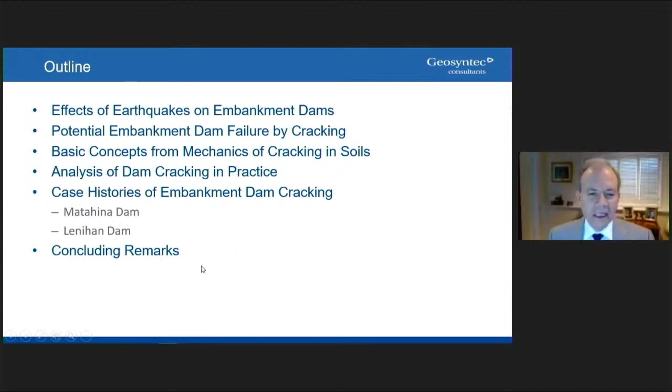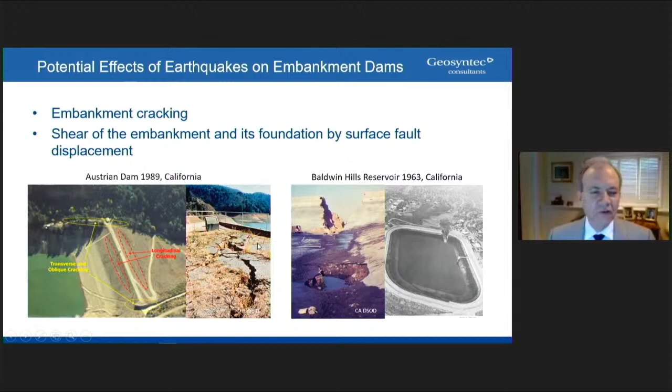Past experience has shown that earthquakes can affect embankment dams in multiple ways. The potential effects of earthquakes on those dams include slope failure of the embankment, sliding of the embankment through the foundation, embankment deformation and settlement, embankment cracking, shear of the embankment and its foundation by surface fault rupture, differential tectonic displacement of the reservoir and of the dam foundation, reservoir rim landslides, which could lead to overtopping of the dam, and failure of the spillway or outlet works.

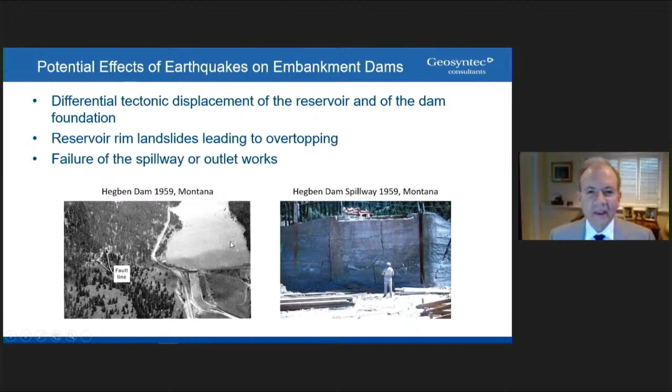Previous observations have shown that embankment dam cracking is one of the most common and hazardous effects of earthquakes on embankment dams. Cracking is usually observed at the crest of dams and along the upstream and downstream slopes, and can take various orientations and shapes.

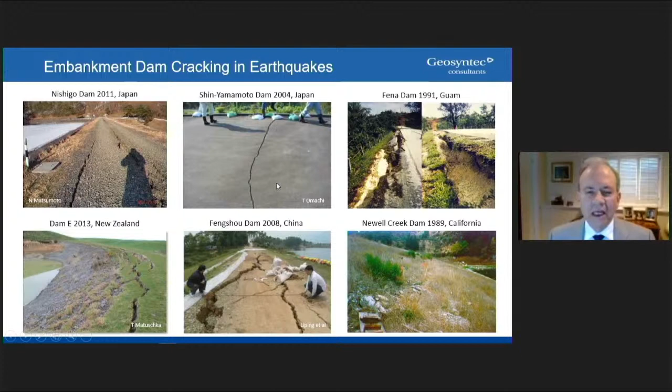However, past observations have also shown us that earthquake-induced cracks are commonly oriented in longitudinal and transverse directions relative to the dam axis. As pointed out by Sherard in 1973, earthquake-induced cracks are frequently similar in pattern to cracks due to static loading.

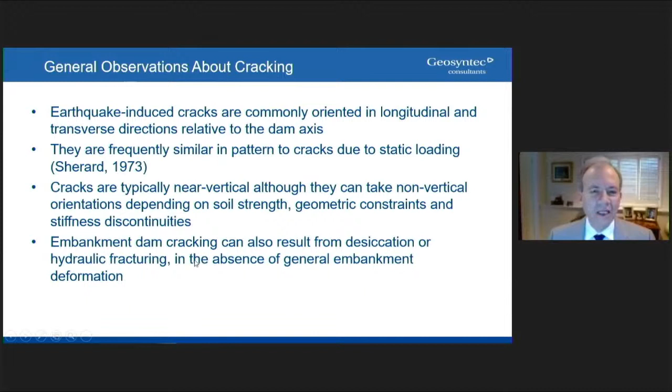Cracks are typically near vertical because of the sustained stress field imposed by gravity. However, they can also take non-vertical orientations due to arching, depending on soil strength, geometric constraints, and stiffness discontinuities. It is also important to note that embankment dam cracking can also result from desiccation or hydraulic fracturing in the absence of general embankment deformation.

The mechanisms of dam deformation and cracking induced by earthquakes are generally associated with transverse spreading of the embankment and settlement of the shells, which lead to tensile strains normal to the dam axis, resulting in longitudinal cracking. Strong earthquake shaking and dam deformations along the longitudinal axis of the dam, as well as settlement, can lead to transverse cracks, particularly near steep abutments or above irregularities in the foundation profile of the dam.

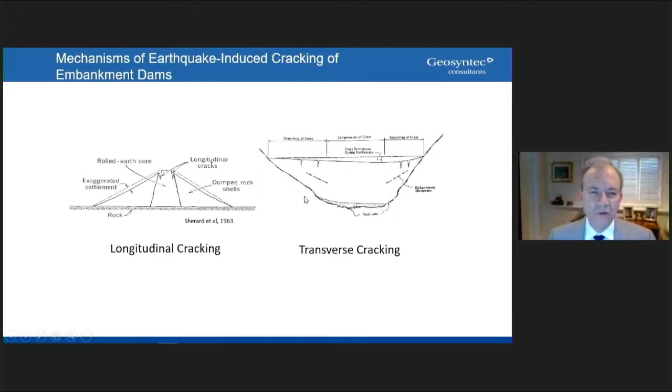Our experience tells us that earthquake cracking can lead to dam failure and breaching in multiple ways. Earthquake-induced cracking is an early step in various potential failure modes in embankment dams. For example, cracking can lead to increased seepage and leakage, which in turn can lead to internal soil erosion and piping failure of the dam. Or it can lead to embankment saturation and instability, or both. Cracks oriented transverse to the dam axis, which allow concentrated flows through the embankment, are particularly dangerous.

The mode of failure of embankment dams by cracking and piping can be visualized by considering a zoned embankment dam with pervious shells, a clay core, and a chimney filter and drainage blanket. Let's assume that an earthquake occurs and cracks the core crosswise below the reservoir level. The crack provides a conduit for concentrated leakage across the core.

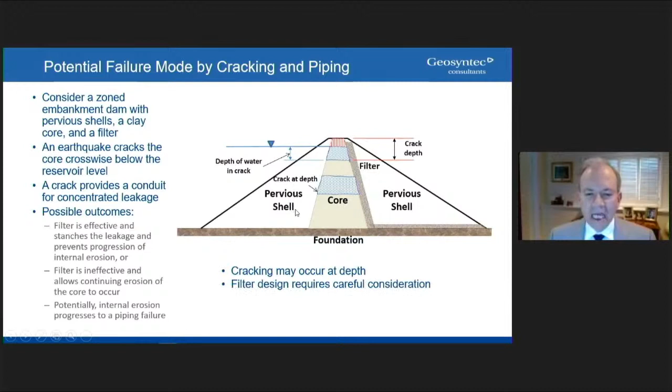It is important to remember that cracking can occur at depth, in fact at significant depths, as I will show later. It is also quite clear that filters and drains are critical elements to the safety of embankment dams, and that filter design requires careful consideration. Evaluation of this type of PFM, potential failure mode, requires reliable assessment of the potential for, the location, and the extent of cracking.

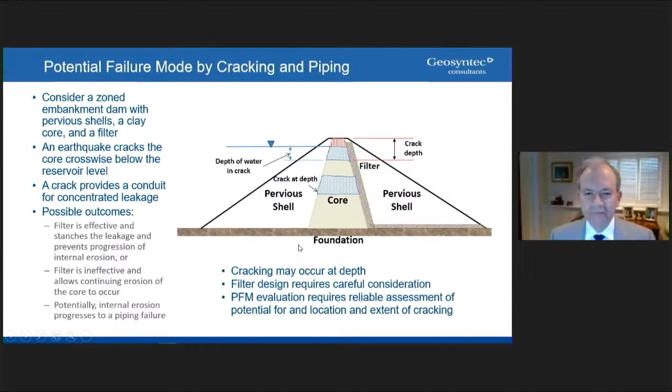To better understand the potential for cracking in embankment dams, it is useful to review some of the basic concepts about the mechanics of cracking in soils.

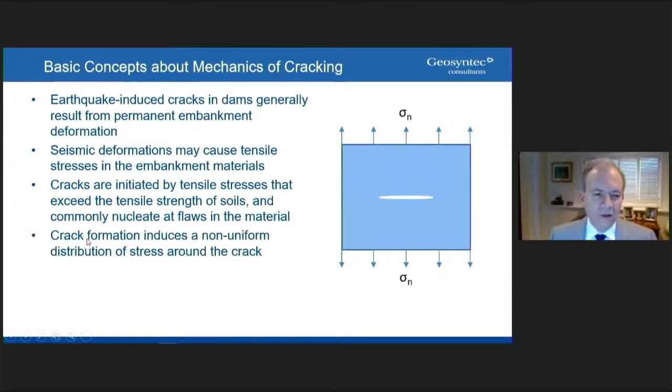Firstly, earthquake-induced cracks in dams generally result from permanent embankment deformation. This is because seismic deformations may cause tensile stresses in the embankment materials. Cracks are initiated when those tensile stresses exceed the tensile strength of soils and commonly nucleate or originate at flaws in the material. Once a crack is formed, it induces a non-uniform distribution of stress around the crack, such that the cracking in soils continues to propagate until the driving stress conditions change or the capacity of the soil to support an open crack is exceeded.

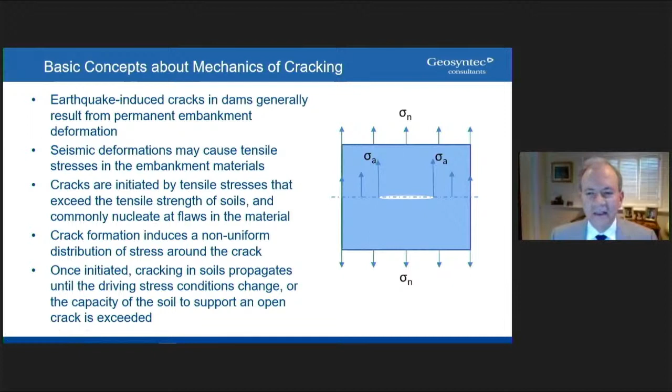Tensile failure of soils is typically quite brittle, and this is because cracks propagate by fracturing as opposed to yielding of the soil. Cracking can be expected to occur when and where the tensile stress exceeds the tensile strength of the soil. When the tensile stress reaches the tensile strength, the material completely loses its ability to carry tensile stress.

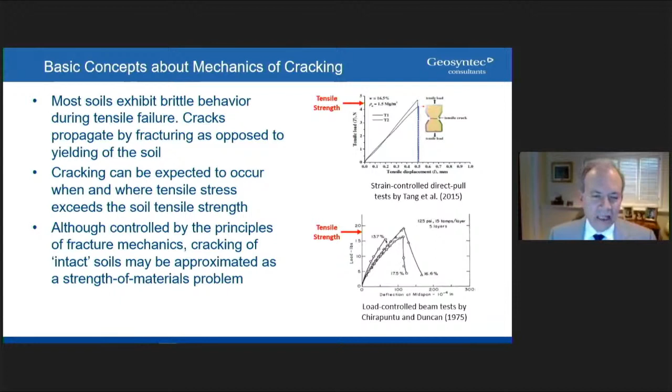Although the process of cracking is very complex and is controlled by the principles of fracture mechanics, cracking of intact soils may be approximated as a strength of materials problem. These concepts provide a basis for the analysis of cracking in practice. That analysis generally consists of identifying zones of extension where tensile stress exceeds the tensile strength of the soils.

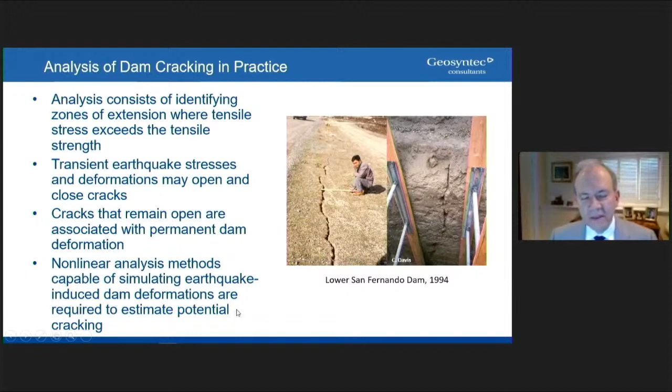It is important to note that transient earthquake stresses and deformations may open and close cracks temporarily. However, cracks that remain open after the earthquake are associated with permanent dam deformation. Therefore, analysis methods for continuous media are generally satisfactory in practice, provided they can simulate permanent dam deformation. This means that nonlinear analysis methods capable of simulating earthquake-induced permanent dam deformations are required to estimate potential cracking.

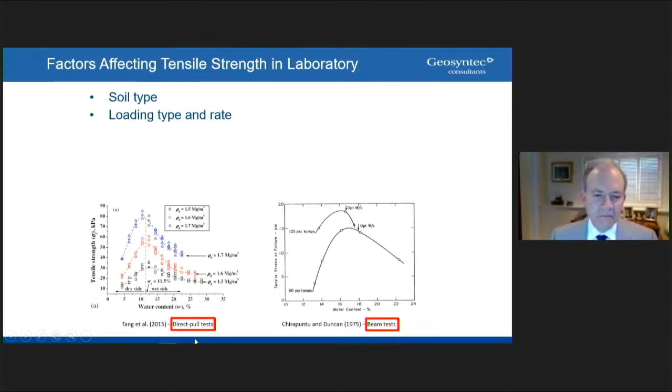Because the tensile strength of soils in the laboratory and in the field plays an important role in cracking, it is useful to understand the factors that affect such strength. These include soil type, the loading type and loading rate, which basically is dependent on the type of test or condition in the field, the water content at the time of loading, and the placement conditions of the soil, including its density and water content.

In these tests, for example, you can see that the tensile strength of soils varies from relatively low values of about 15 kPa to moderate strength values of maybe 75 kPa, and peaks at a water content near just dry of the optimum water content.

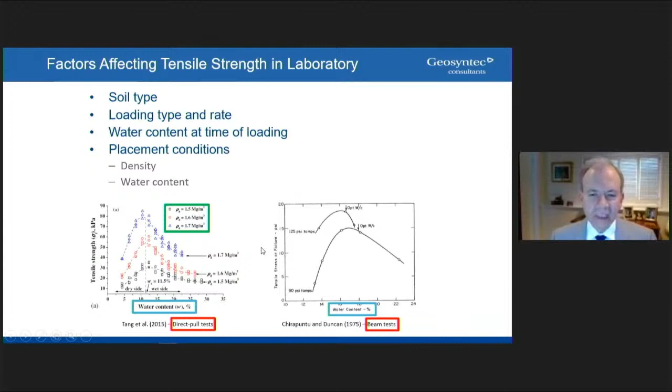The strength that matters for analysis is the field strength. It's important to keep in mind that because cracks nucleate at flaws in the material, the tensile strength of soils depends on specimen size.

Laboratory testing has shown that the tensile strength of soils decreases inversely proportionally to the volume of the stressed soil. This is expressed by an equation where the tensile strength is basically an inverse function of the volume of a specimen subjected to at least 95% of the maximum tensile stress. Because the volumes involved in the field are very large, the field tensile strength of embankment dam materials is generally 1/10 to 1/30 of the strength in the laboratory and is typically very low.

Therefore, for dams, it is quite common to assume a zero tension cutoff in the analysis. This is important because overestimating the tensile strength of soils leads to underestimating the potential and extent of cracking in the field.

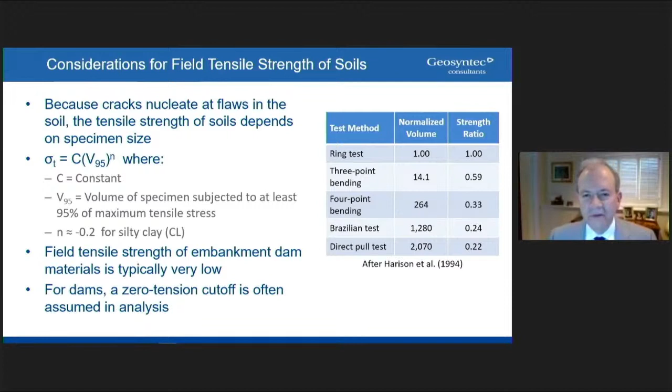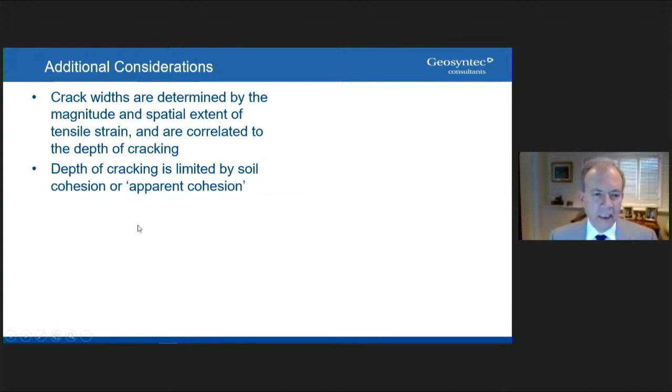In addition, crack widths are determined by the magnitude and spatial extent of tensile strains and are correlated to the depth of cracking. The depth of cracking, however, is limited by soil cohesion or apparent cohesion. Generally, the maximum depth of cracking can be obtained from an expression where C is the cohesion of the soil and phi is the friction angle.

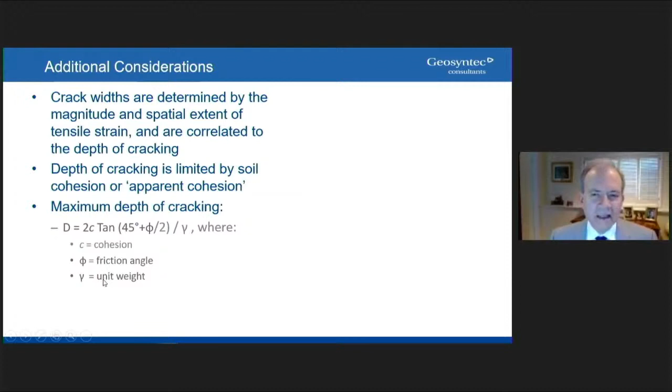From this expression, it follows readily that coarse, cohesionless soils are unable to support open cracks. Therefore, in embankment dams, zones of these materials will not crack. It is also important to note that fine-grained, partially saturated, cohesionless soils can temporarily support open cracks and hold a roof.

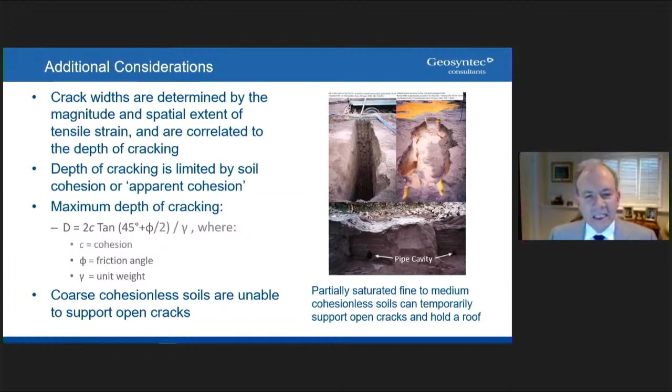With this background in mind, let's examine two case histories of embankment dam cracking that illustrate the potential for cracking during construction and reservoir filling and earthquake shaking, and also the ability of current methods of analysis to simulate potential cracking. The first case history corresponds to the Matahina Dam in the North Island of New Zealand.

This case history will examine cracking during construction and reservoir filling, and then during a large earthquake in 1987. The second corresponds to Lenihan Dam in California. In this case, we'll examine the response of the dam to strong shaking during a major earthquake and the ability of numerical analysis of seismic response and observed cracking to simulate those effects in dams.

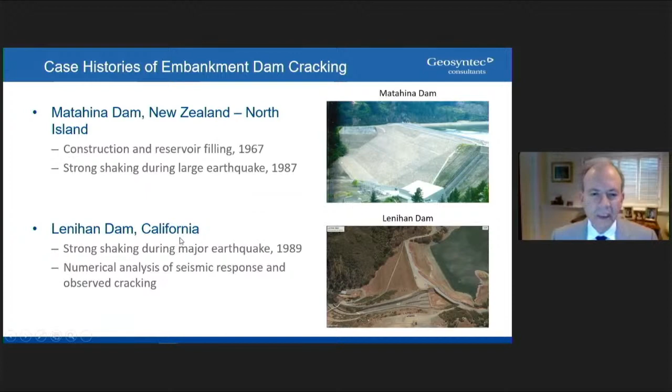Matahina Dam is a rock-filled dam with an inclined earth core and a height of 82 meters, a crest length of 420 meters, and a minimum operating freeboard of 3 meters below the crest elevation. It retains a reservoir of 55 million cubic meters, and the population at risk downstream of the dam exceeds 100 people.

This image on the right is a view of the dam prior to retrofit of the structure in 1997, and this is the corresponding maximum dam section. The outlet works and spillway are sited on a rock spur that protrudes into the river valley and also forms the left abutment of the dam.

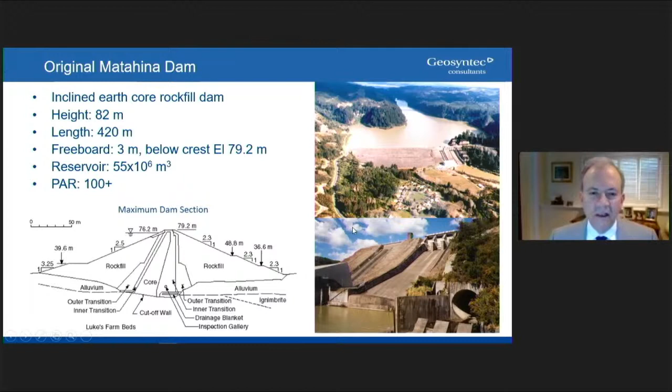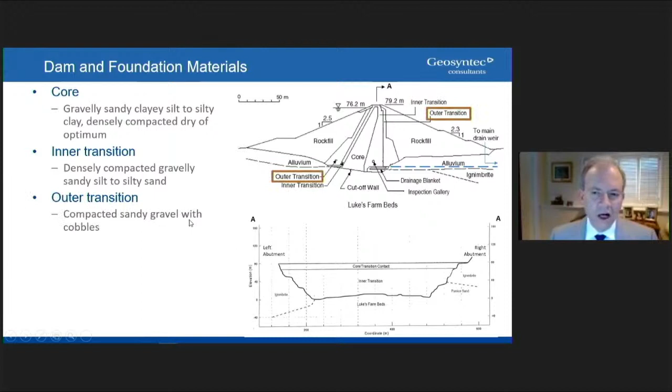The dam and foundation materials include a central core of gravelly, sandy clayey silt to silty clay, which was densely compacted dry of optimum. The core is flanked by upstream and downstream inner transitions, which are densely compacted gravelly sandy silt to silty sand. Outer transitions of compacted sandy gravel with cobbles separate the inner transitions from the rock-filled shells.

Those shells consist of compacted, quarried, hard ignimbrite rock. The shells are founded on dense, coarse alluvium, and the embankment core and the alluvium are founded on tertiary sedimentary rock, while the abutments are made of hard ignimbrite rock. Hard ignimbrite rock also underlies the downstream toe of the dam.

Please take note of the steep and stepped nature of both abutments. Also note that seepage through the dam and the foundation is collected by a central drain and weir, referred to as the main drain weir, which discharges into the original stream channel downstream of the dam.

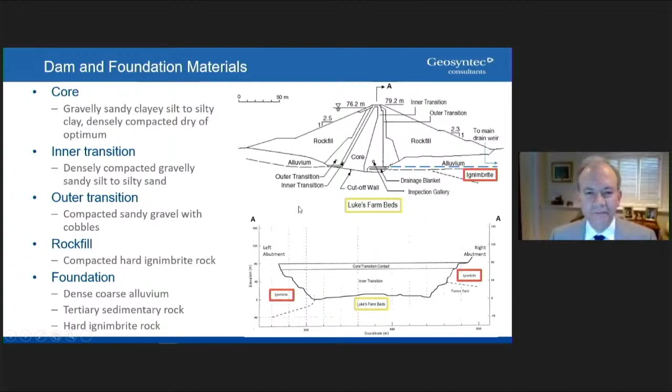The vulnerability of the dam to internal erosion can be evaluated by examining the particle size distributions of the dam materials and other engineering characteristics. Such examination indicates that the core and inner transition materials are readily erodible, are not filter compatible, basically have the same gradation, and in addition are very stiff and have a high cohesive strength, and therefore are able to crack and hold a roof.

The outer transition materials are not filter compatible with the inner transition and the core, and their gradation is also susceptible to segregation during placement. In addition, the rock fill in the shells is very coarse. So all these conditions basically indicate a clear vulnerability to internal erosion within the embankment.

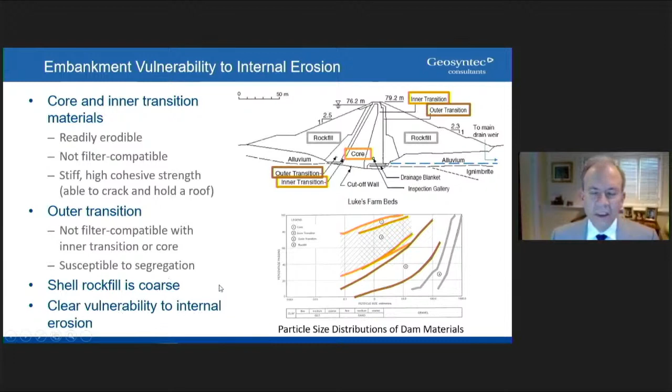The dam was constructed between 1965 and 1966. As the embankment was raised, settlements of the fill were measured using settlement cells installed at various elevations within the fill.

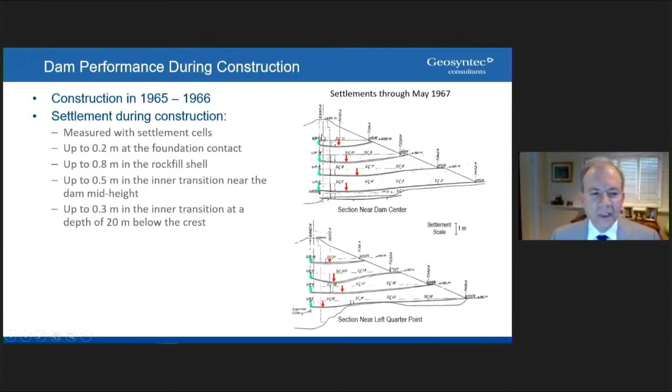The measurements indicated up to about 0.2 meters of settlement at the foundation contact, up to about 0.8 meters of settlement within the rockfill shells at around mid-height, up to about 0.5 meters of settlement in the inner transition near the dam mid-height, and up to 0.3 meters in the inner transition at a depth of 20 meters below the crest. That is an important number to remember, the 0.3 meters.

Interestingly, as the embankment reached a large height, vertical cracks were observed at the contact between the fill and the right abutment. The builders and designers drilled boreholes to investigate and repair the damage into the core, and those boreholes were subsequently grouted.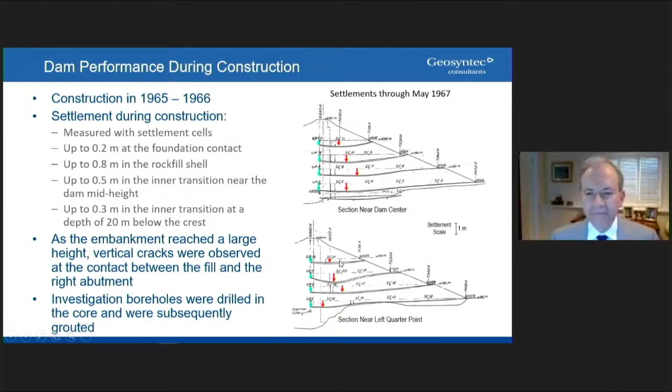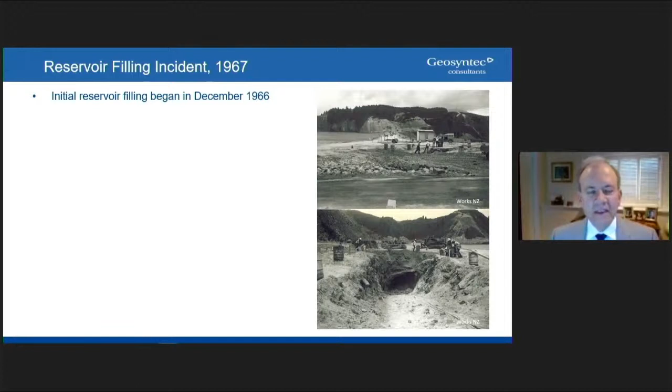The dam experienced a serious incident of internal erosion and piping during first filling of the reservoir in 1967. Initial reservoir filling began in December of 1966, and the reservoir rose quite quickly to about elevation 64, where it was held for 2 weeks. As the flows at the main drain weir increased gradually with the increasing reservoir level and stabilized at about 70 liters per second when the lake was held at 64 meters, that corresponds approximately to about 2.5 cubic feet per second. A relatively large flow, but it was not unexpected by the designers.

After 2 weeks, the lake was allowed to continue to rise. And when it reached 71 meters, the main drain flows increased suddenly to 560 liters per second, which corresponds to about 20 cubic feet per second. And worse, they became cloudy. Fortunately, after a few hours, the flows decreased and subsequently cleared, and they stabilized at about 250 liters per second, while the reservoir continued to rise to the maximum storage level of elevation 76.

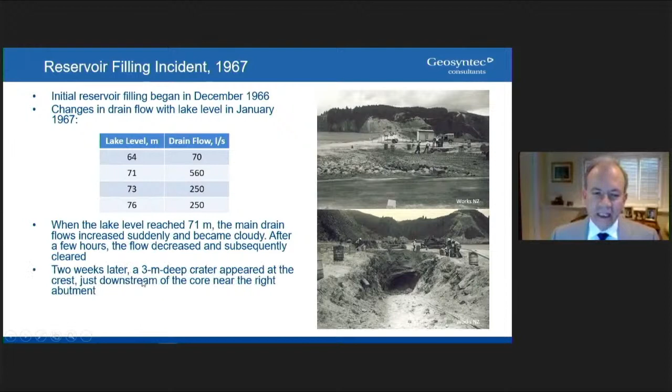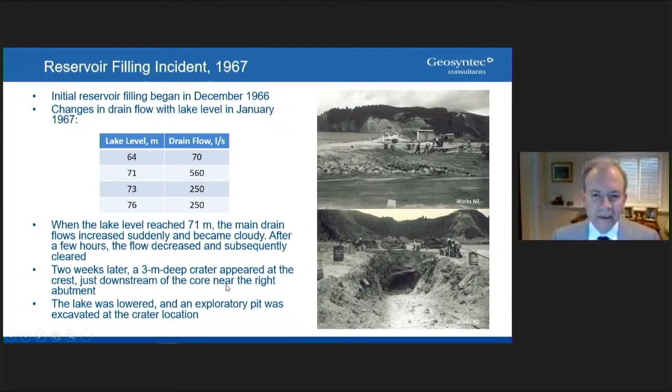2 weeks later, though, a 3-meter deep crater appeared at the crest, just downstream of the core, near the right abutment. The lake was immediately lowered back to elevation 64, and an exploratory pit was excavated at the crater location. The surface crater was found to be the top of an erosion chimney that extended to a concrete bench on the right abutment at elevation 67.4, 12 meters below the crest.

Within the exploratory pit, 2-inch wide cracks were observed in the exposed faces of the core and the downstream inner transition, to depths of about 15 meters or so. In addition, traces of upstream inner transition material were seen in cracks in the core. And grout was observed in cracks within the downstream inner transition. It is quite likely that that grout was injected during the core repairs at the time of construction, but it's also possible that it flowed into the inner transition during installation of the abutment grout curtain.

It was concluded at the time that about 100 cubic meters of downstream inner and outer transition materials had eroded through a rockfill void at the abutment contact that was seen beginning from the exploratory pit.

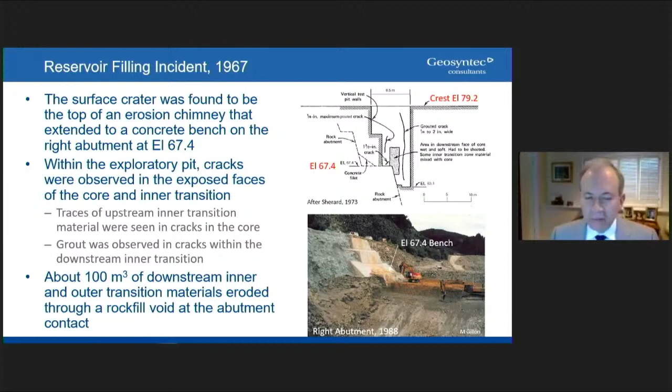Years later, investigations revealed that differential settlements had led to cracking of the core and the inner transition. Cracks to a depth of about 25 meters had allowed concentrated leaks. And because of the lack of filter compatibility, those leaks had led to internal erosion of the core and inner transition into the outer transition.

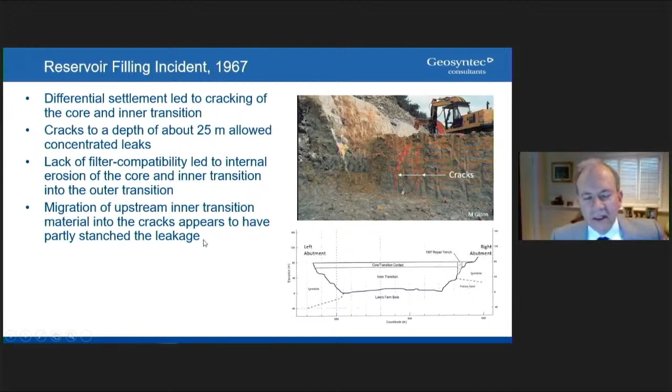It appeared, though, that migration of the upstream inner transition material into the cracks in the core partly stanched the leakage. And interestingly, that condition withstood hydraulic heads of about 10 meters, while the reservoir rose temporarily to elevation 76 before it was lowered back to elevation 64.

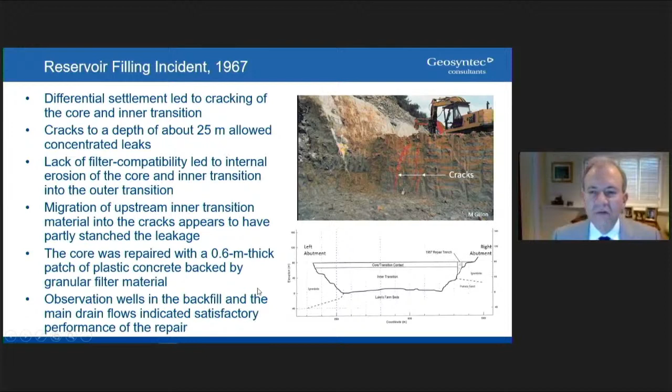The core was repaired with a 0.6 meter thick patch of plastic concrete backed by granular filter material, as shown here on this cross section of the dam. Observation wells within the backfill of the exploratory pit and the main drain flows indicated satisfactory performance of the repair for the next 20 years.

On March 2nd of 1987, the Edgecumbe earthquake shook the region. It was a moment magnitude 6.5 earthquake with a normal faulting mechanism and a focal depth of 12 kilometers. The earthquake was located within New Zealand's North Island Whakatane Graben, which is part of this central volcanic region. And the main surface fault rupture came to within 11 kilometers of the dam and produced

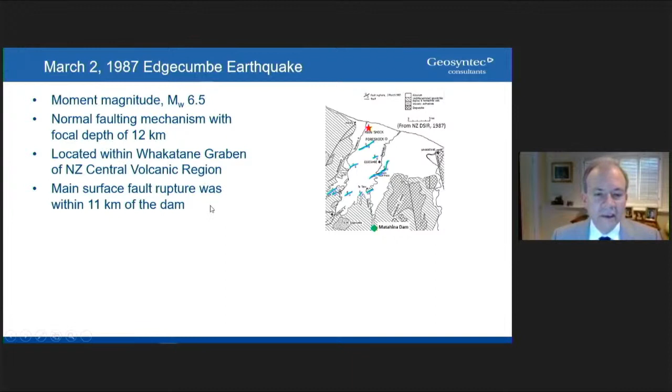strong ground motions, which were recorded at 5 accelerographs at the dam. The peak accelerations recorded by the instruments on the main section of the dam are shown in this table, where it can be seen that the peak ground accelerations in the transverse direction at the base were on the order of 0.24 G, while at the crest were about 0.35 G, which is quite strong motion.

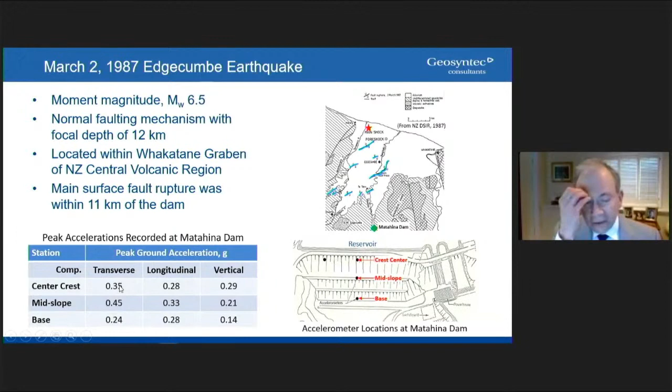The earthquake caused relatively small settlements of the crest, up to about 4 centimeters. In addition, the downstream slope vertical and horizontal displacements were less than about 10 centimeters and 25 centimeters respectively, and they decreased gradually down the slope. The upstream rock fill settled about 0.8 meters near the crest.

At the same time, the core and foundation piezometers showed no significant changes from normal levels. However, flows at the main drain weir increased slightly and became turbid initially, but they decreased soon after. The reservoir was drawn down 2.5 meters as a precaution, and investigations were undertaken to evaluate the damage.

The earthquake caused cracks at both abutments, several meters long but just a few centimeters wide. In addition, a wide crack opened on the upstream edge of the crest as a result of settlement of the rockfill. There was slight spreading of the crest.

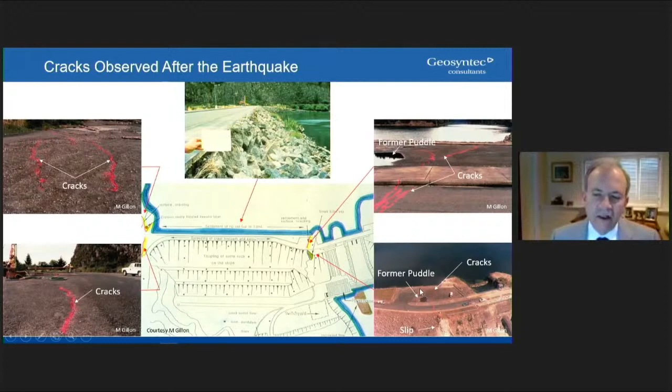Two weeks after the earthquake, a 5-meter diameter erosion cavity was detected by probing upstream of the core at the right abutment. Because the main drain flows had not changed significantly, it was thought that the cavity was probably associated with the 1967 incident.

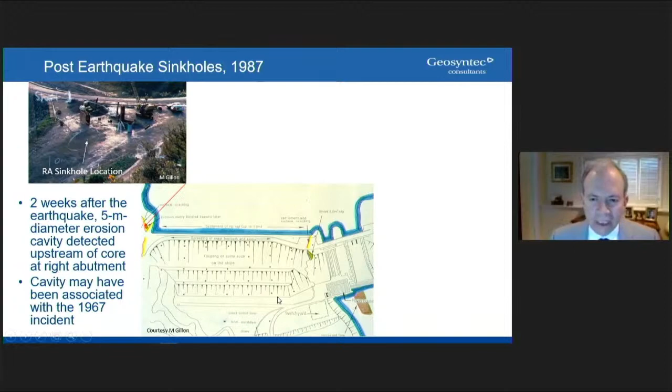Six months after, however, drill holes found cracks in the core at the left abutment. Interestingly, the flows at the main drain seemed unaffected.

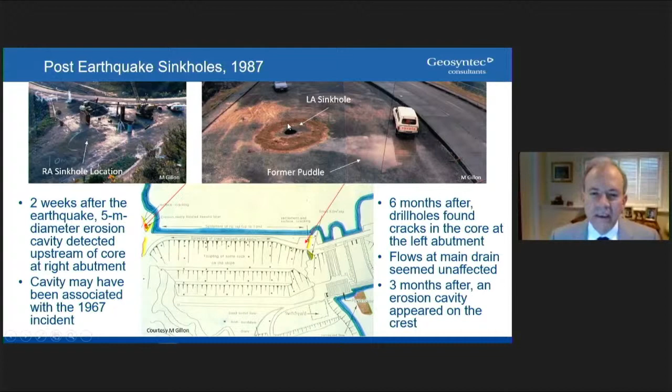However, three months after, an erosion cavity appeared on the crest. The reservoir was immediately drawn down in steps, and the decision was made to undertake repairs to the dam.

While the reservoir was being drawn down, fluctuations in the piezometers within the core indicated continuing internal erosion in the core. And these are the types of fluctuations that were observed in the piezometers.

It was also concluded that the former puddle was evidence of a prior episode of internal erosion. However, because the main drain flows, the piezometer levels, and the conditions at the crest had remained steady for many years, it was concluded that that episode had ceased well before the earthquake.

However, that meant that the earthquake appeared to have disturbed a metastable stanch condition within the core and had reactivated internal erosion.

The dam repairs consisted of reconstructing both abutments to depths of about 30 and 35 meters, very large depths.

And the repair excavations revealed a number of important features about both incidents. First, they showed differential settlement and shear of up to 200 millimeters at steps in the abutments.

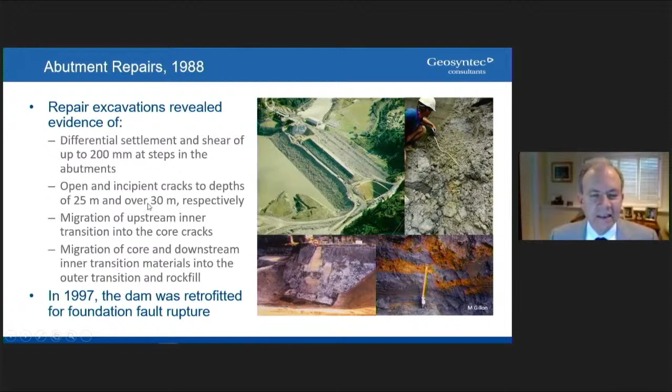Let's turn our attention now to Lenihan Dam, which was previously known as Lexington Dam. The dam is a zoned earthfill embankment with a wide central core, a height of 208 feet, a crest length of 810 feet, and a freeboard of 17 feet above the maximum storage level.

The dam retains a reservoir with a storage of about 20,000 acre feet, and the population at risk is well in excess of 1,000 people. Note the level of the reservoir in October of 1989 at the time of the Loma Prieta earthquake.

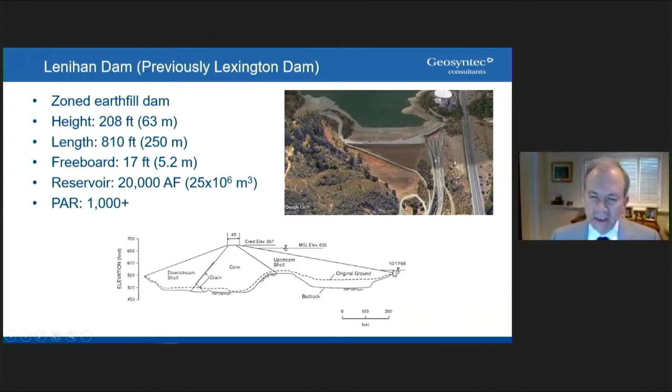The dam and foundation materials include an upstream shell of dense gravelly clay sands. These are materials that have about 15 to 35% gravel and maybe 20 to 50% sands and fines, and are quite dense.

The materials in the upper 80 feet of the core, referred to as the upper core, are very similar, also dense gravelly clay sands. On the other hand, the core materials below 80 feet are a stiff, medium to high plasticity clay with actual plasticity indices in the range of 40 to 45%.

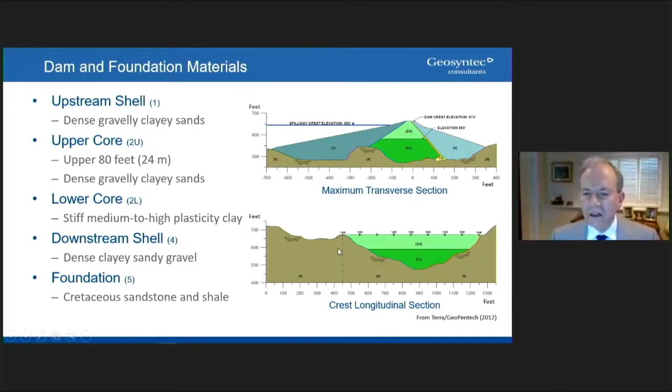The downstream shell consists of dense clayey sandy gravel. I also want you to note this zone, which corresponds to the internal drainage system within the dam. The foundation consists of Cretaceous sandstone and shale of the Franciscan Formation.

The dam was constructed between 1952 and 1953 and has performed well since. That's partly because the materials were densely compacted, placed in 4-inch thick lifts and compacted to over 95% of the maximum laboratory compaction density, in accordance with the 19,500 foot-pound energy standard. From construction to October 1989, before the Loma Prieta earthquake, the crest settled a maximum of about 1.9 feet, slightly less than 1% of the structural height of the dam.

The dam underwent small to moderate shaking in earthquakes of approximate magnitude 5 on June 27, 1988, and in August 1989, with less than 3/4 of an inch of settlement and no reported cracks. The earthquake motions during the August 1989 earthquake, recorded at the left abutment on rock, showed peak accelerations less than 0.1 G, and on the embankment, peak accelerations slightly greater than about 0.1 G.

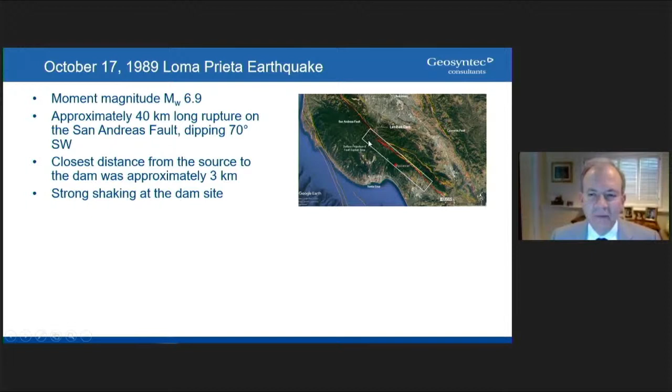On October 17th, 1989, the Loma Prieta earthquake shook a large region of Northern California. This was a moment magnitude 6.9 earthquake, generated by an approximately 40-kilometer long rupture on the San Andreas Fault, dipping about 70 degrees to the southwest. The rupture came to within 3 kilometers of the dam and produced strong shaking at the dam site.

This was recorded by 3 accelerographs. One was located on rock near the spillway entrance on the left abutment, referred to as the left abutment instrument. A second was located on the embankment crest near the maximum dam section, referred to as the right crest instrument, and a third instrument in between is referred to as the left crest instrument.

The peak ground accelerations recorded at the site during the earthquake are shown in this table. You can see that the peak ground accelerations transverse to the dam axis, on rock and at the maximum section, were on the order of 0.45 G, which is very strong motion.

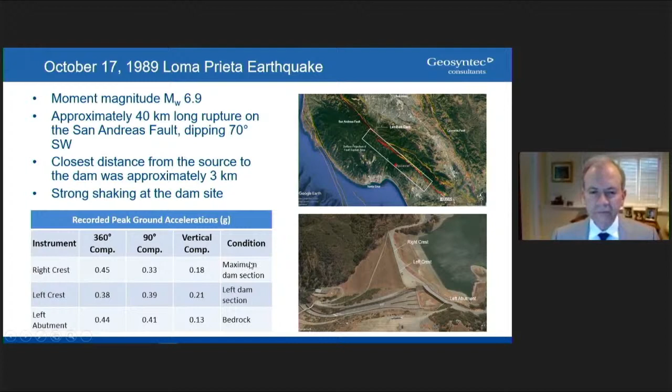As I said earlier, the reservoir was 117 feet below the crest at the time of the earthquake because of a prolonged period of drought.

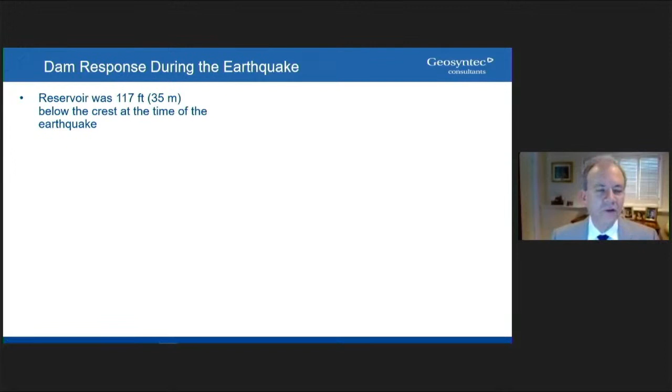The crest settlements resulting from the earthquake were up to about 10 inches, 25 centimeters or so, while the crest transverse horizontal displacements were up to about 3 inches. Note that those transverse displacements correspond to slight rotation of the crest around the third point or so.

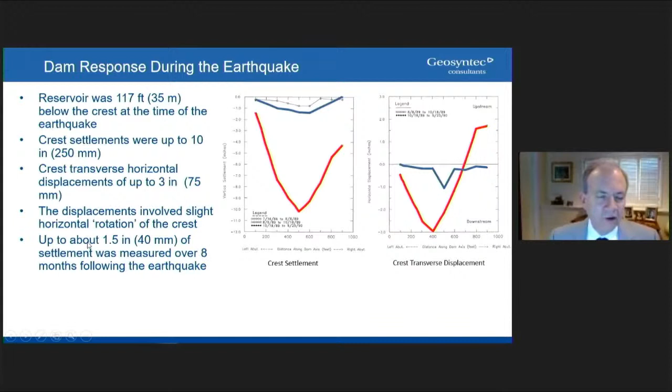In addition, after the earthquake, over the following 8 months, the survey monuments on the crest recorded about 1.5 inches of settlement. I would like you to remember that the crest vertical and horizontal displacements had a similar pattern to the dam's long-term displacements.

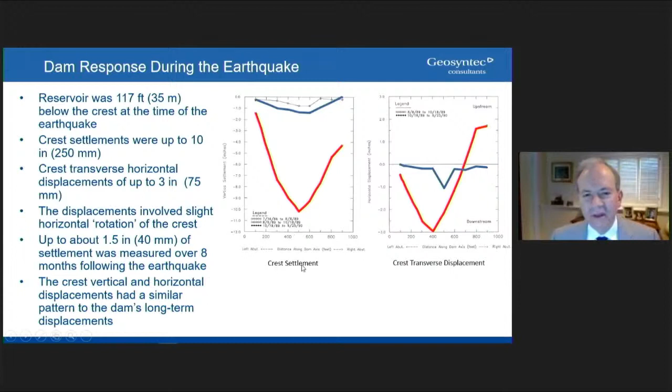Piezometer levels within the embankment were measured at several locations in piezometers and observation wells. During the earthquake, the piezometric levels in the core and the upstream shell rose 5 to 8 feet and decreased slightly over several months after. 6 weeks after the earthquake, a wet area appeared on the downstream slope and lasted for a few months. A downstream observation well rose up to 33 feet over roughly the same period.

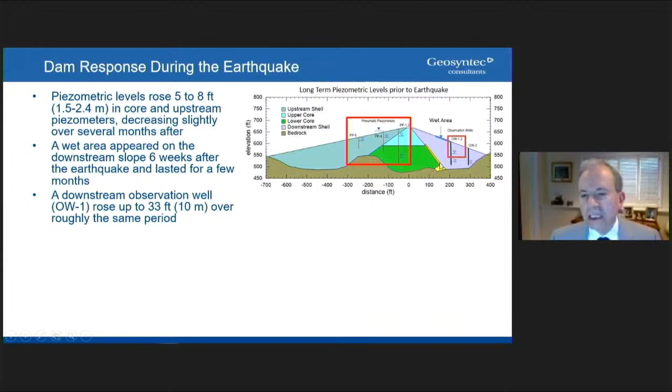It is quite possible that the rise in levels of that observation well resulted from redistribution of excess pore water pressures that may have been generated within the dam's internal drainage system.

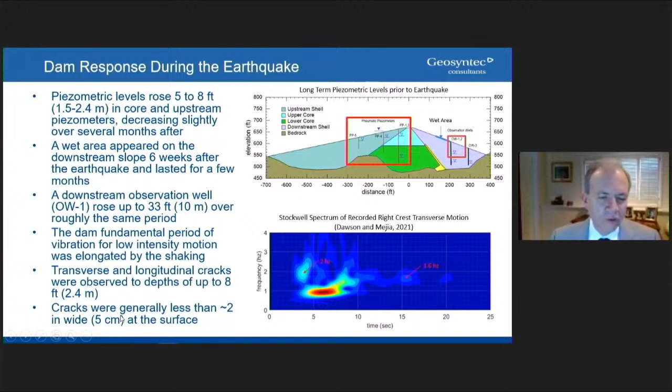As shown by a Stockwell transform of the recorded right crest transverse motions, the dam's fundamental period of vibration for low intensity motion was elongated by about 20% by the earthquake. In addition, the earthquake resulted in transverse and longitudinal cracks to depths of up to 8 feet, and the cracks were generally less than about 2 inches wide at the surface.

All of these observations, together with the recorded ground motions, make this case history an excellent case for analysis of the potential for embankment dam cracking.

The approach used for the analysis of the dam consisted of using the motions recorded at the left abutment as input to a numerical model of the dam. The model was then used to evaluate how it predicted observed dam response in terms of several parameters, including the motions recorded at the right and left crest stations, the crest settlements and transverse displacements, and the location and extent of dam cracking.

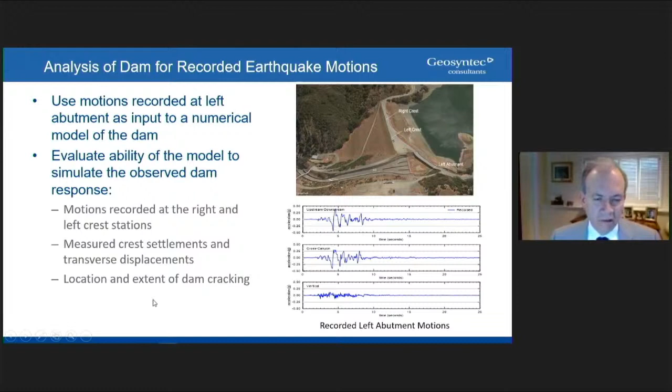This is a view of the model. It was a finite difference, three-dimensional, nonlinear total stress model. Two soil constitutive models were used, the Mohr-Coulomb model and a parallel Iwan model implemented by Dr. Dawson, both with a zero tension cutoff to represent the tensile strength of the embankment materials.

Free field boundaries were used on the model sides, and a compliant boundary was used at the base to simulate the semi-infinite extent of the foundation bedrock.

The left abutment motions were deconvolved separately using a horizontally layered model in one-dimensional methods, and were then input at the base of the three-dimensional model to drive the analysis. As expected, the three-dimensional model reproduced the recorded motions at the abutment quite closely, and this confirmed that the seismic response of the embankment had not affected the left abutment motions.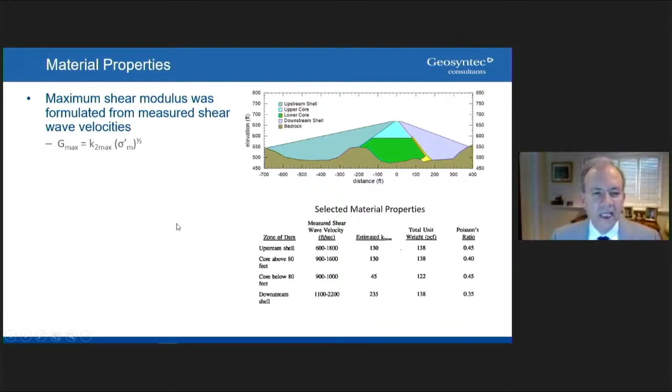The strain hardening function for the Iwan model was described by the modulus reduction relationship for each material. Plastic yield for both the Mohr-Coulomb model and the Iwan model was defined by the soil shear strength obtained from the laboratory tests. The undrained shear strength was used for all materials, defined as a function of the consolidation effective stress, and the foundation rock was assumed to be elastic.

I am only going to show the results for the Mohr-Coulomb model. The results for the parallel Iwan model are being presented in a separate venue, almost concurrently with this conference.

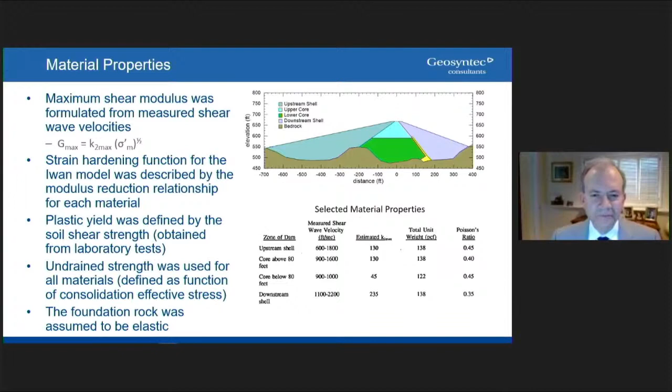A comparison of the measured crest displacements is shown in this frame, where we compare the measured values, shown by these squares, with the calculated values shown by the blue line, also in the vertical direction and in the upstream-downstream direction. The comparison indicates that the calculated crest settlements agree reasonably well with the measured settlements.

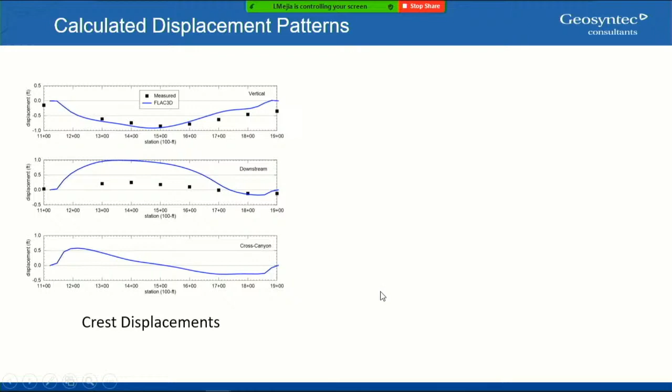This can be seen more easily by examining the pattern of surface horizontal displacements resulting from the model. That pattern indicates that portions of the dam crest near the abutments moved towards the center of the dam, while at the same time, the slopes spread upstream and downstream.

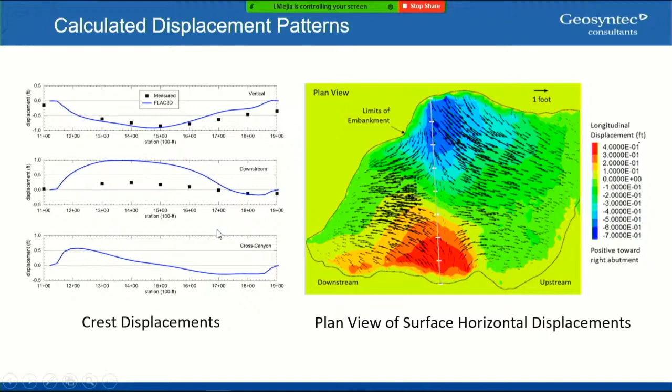The corresponding permanent volumetric strains calculated from the analyses are shown in this slide. Volumetric strain is used as a proxy for tensile strain, simply because it is a good indicator of net tension under conditions of combined tensile stress and tensile shear and compressive strain.

The frame on the left shows a plan view of the calculated surface volumetric strains, while the frame on the right shows section views for the maximum longitudinal section and the right crest section.

The amplitude of the calculated strains is shown with this colored scheme, in which strains increase with the lighter, brighter colors. It may be seen that the pattern and location of tensile strains at the surface, which actually approached about 1% or so, agrees reasonably well with the observed pattern of cracking at the dam. And the locations of the largest cracks agree with the largest calculated strains.

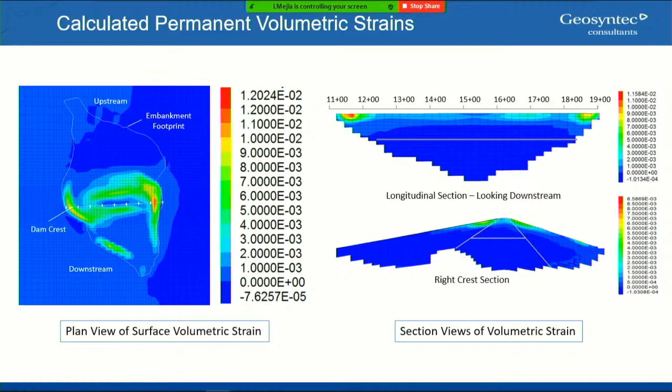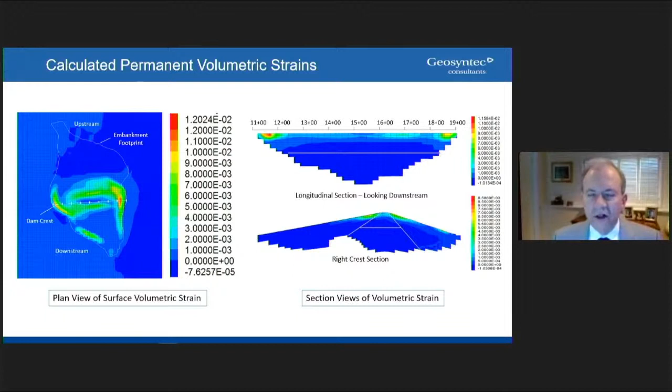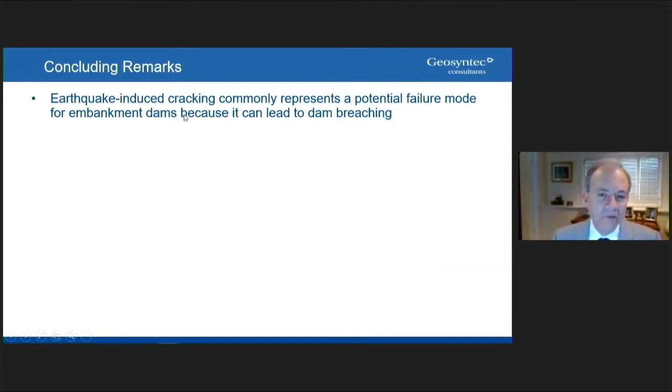So these two case histories have illustrated some of the key aspects of embankment dam cracking under earthquake shaking. I would like to summarize those for you in closing, and also leave you with the following thoughts. First, earthquake-induced cracking commonly represents a potential failure mode for embankment dams because it can lead to dam breaching.

Cracks oriented transverse to the dam axis that allow concentrated flows through the embankment are particularly dangerous. Cracks from earthquakes are frequently similar in pattern to cracks caused by static loads and are typically near vertical, although due to arching, they can also take non-vertical orientations.

This is actually a very important observation, because if one wants to assess potential zones where earthquake cracking might be expected, it is important to study the pattern of cracking under static loading of a dam.

Moderate deformations during construction or reservoir loading can lead to cracking of stiff cohesive materials, and in the absence of reliable filters, to internal erosion of an embankment dam. Steep abutment slopes and foundation shape and stiffness discontinuities can lead to differential settlements and cracking of stiff cohesive materials to depths greater than 30 meters.

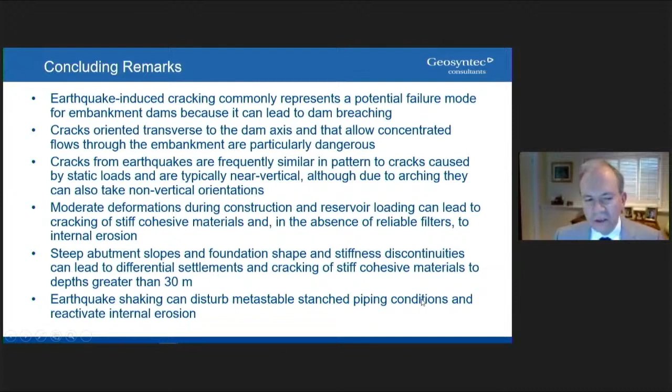Earthquake shaking can disturb metastable stanched piping conditions and reactivate internal erosion.

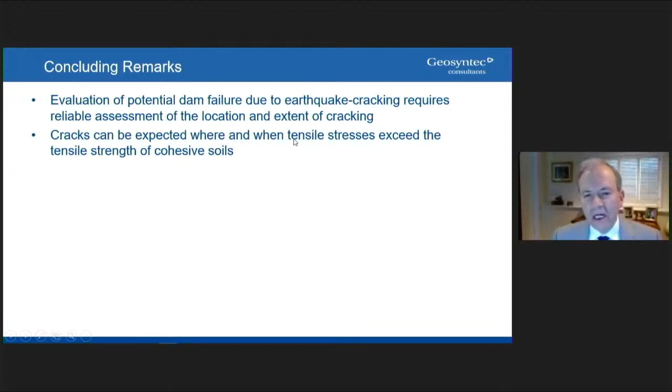The evaluation of potential dam failure due to earthquake cracking requires reliable assessment of the location and extent of cracking. Cracks can be expected where and when tensile stresses exceed the tensile strength of cohesive soils. Coarse, cohesionless soils are unable to support open cracks.

However, and this is important, due to apparent cohesion, partially saturated fine to medium cohesionless soils can temporarily support open cracks and hold a roof.

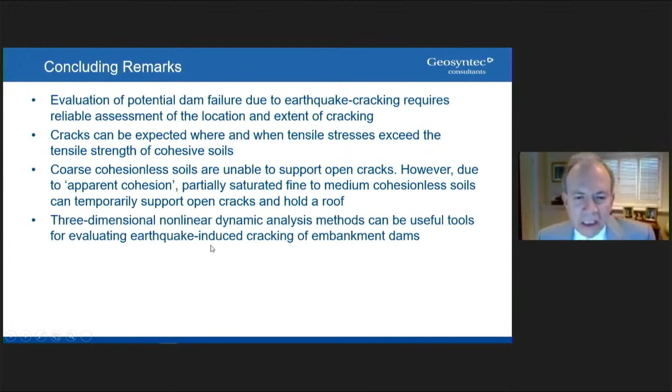Three-dimensional nonlinear dynamic analysis methods can be useful tools for evaluating earthquake-induced cracking of embankment dams. Earthquake shaking in the dam longitudinal direction plays a key role in the development of transverse cracking in embankment dams.

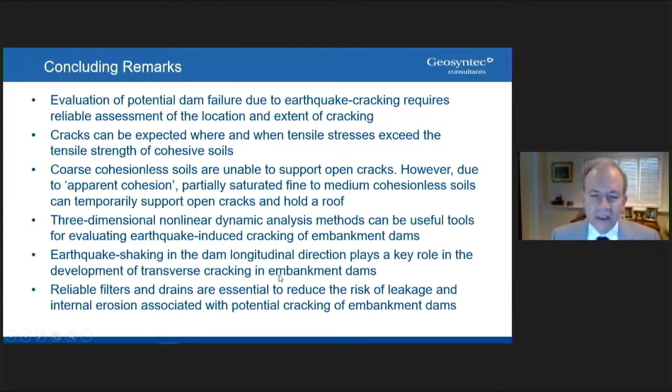And finally, reliable filters and drains are essential to reduce the risk of leakage and internal erosion associated with potential cracking of embankment dams. In this regard, it is very relevant to examine the wisdom and foresight of Professor Peck.

As he stated in 1980, the literature already has much to say about cracking of earth dams. The emphasis, however, is on the mechanics of producing the initial cracks, an aspect that has recently become at least partly amenable to analysis. The analytical results serve a useful purpose. Reduction of cracking can undoubtedly be achieved most successfully if the causes of cracking are understood and avoided. Nevertheless, to accord with the principle of defense in depth, every dam should be designed on the assumption that the core may crack and that the dam should be safe even if it does.

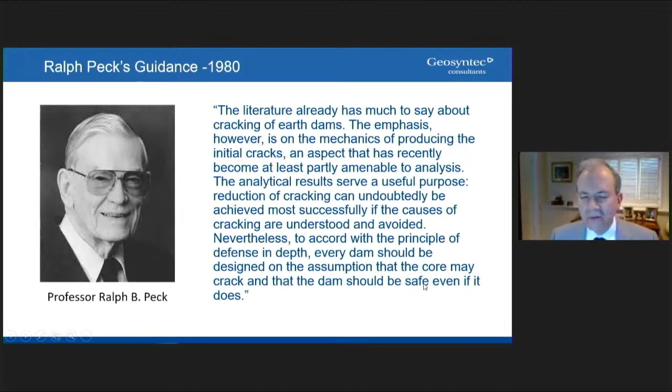Thank you very much.

I can see Brad, and I think we're back on here. I'm not sure if I'm supposed to take questions or not. In any case, I want to thank everyone that listened to the presentation for their attention.

Thank you, Lelio. I think one of my favorite things about our award lectures is that they're named for people and given in the spirit of these individuals who so many of us have had personal connections with. A lot of disciplines don't have that. You don't see any mathematicians who lived in the time of Archimedes, for instance, because that was 2,000 years ago. So normally what would happen for those of you watching is that right now, Lelio would have the Peck medal awarded to him, or that would have happened before the lecture, with handshakes and photos with the Geo-Institute president. It's a little different this time. We sent Lelio the medal in the mail, and it made it there in one piece. We do know that. But I just want to say thank you again. And another thing I really enjoy are the reflections on the words of these greats of this field and the expression of how research has grown and sprouted out of the seminal work that they did, which wasn't too long ago, actually. So this was fantastic.